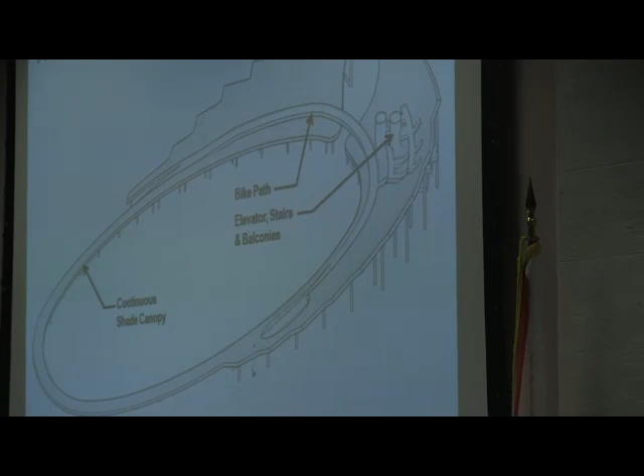So we put together a very knowledgeable group of consultants, and they brought in some other additional experts to help us at the level of the project that we are at today.

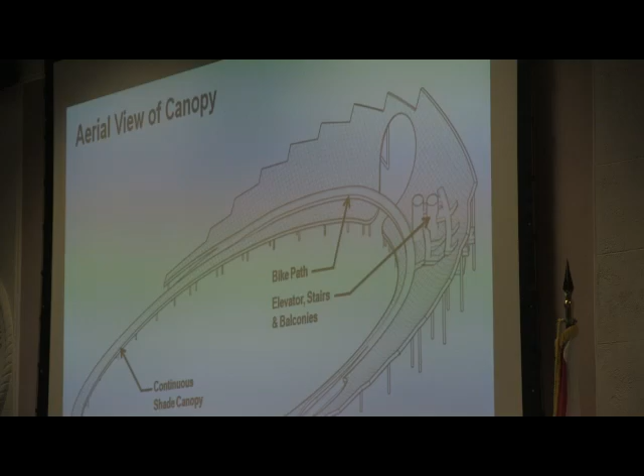Also, before I get into the details, I want to just give a little bit of background on kind of what got us here to the decision to go with a recommendation for an aluminum canopy.

In the basis of design, the team looked at several options, and the key to the canopy was taking into account the life cycle costs, the maintenance, the initial costs, and the visual impact. So the team considered a number of options.

One was precast concrete panels. The advantage of the precast panels was that they could be prefabricated locally. There's some delivery cost advantages. They can resist the uplift. They're heavy, but the heaviness also was a disadvantage due to the weight and the need to oversize the foundations. And also, in addition to those disadvantages, there's also the discoloration of the concrete due to mold and algae, the excessive formwork that's required, the difficulty to replace those panels, and just the overall maintenance.

They also looked at lightweight concrete panels. Again, it's got a great strength to weight ratio, long life. However, it's got complex connections and a very high initial cost, and also susceptible to some of the discoloration and mold and algae and maintenance.

Also considered, perhaps, fabric. Fabric was dispensed with fairly quickly. The ability for fabric to hold up under the extreme conditions over Tampa Bay just didn't work out.

So with that, the team at the BOD stage recommended that the entire canopy be made out of aluminum. And in the BOD report, they recommended an aluminum alloy, the 5086 alloy, and I'll explain a little bit about that, with a high-grade Kynar finish, which is the coating on top of the aluminum, and all of that on a galvanized steel frame, targeted to a 75-year life. Those were the standards that we put out from the very beginning.

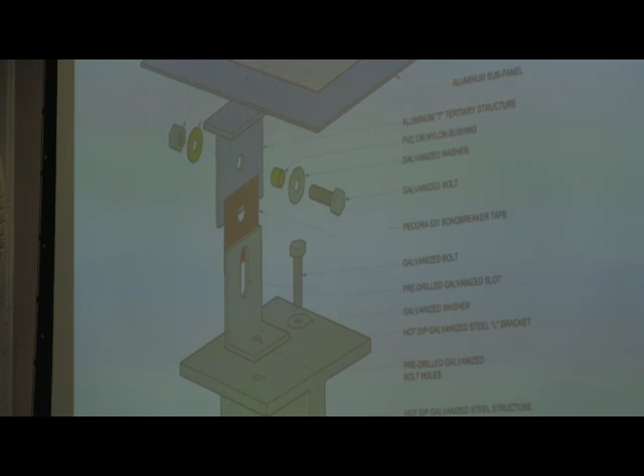So I want to walk you through the assembly as we're looking at it today. Again, this is schematic, still a lot of work left to do, and this is just one small section of the assembly. What's in blue is aluminum, what's in light green is galvanized steel, and what's in red and yellow are bond breakers set up to separate the galvanized steel from the aluminum. So I'll walk you through this.

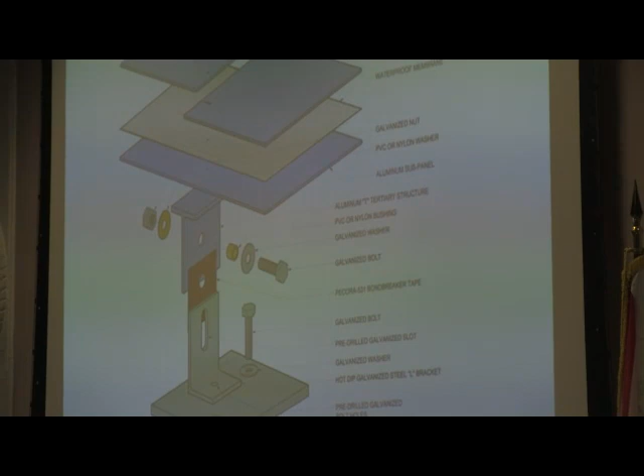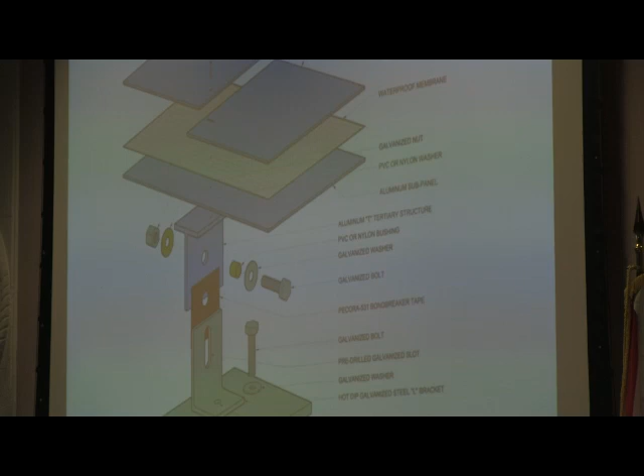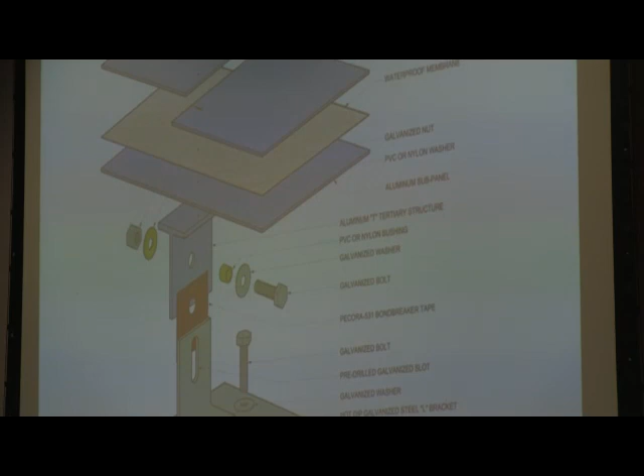We're well beyond where this development of the assembly would normally be at schematic design. On this particular piece, we'd probably consider this level of detail coming later in the drawing development, but we're further ahead. Still, there's plenty of work left to be done. The canopy is intended to be made out of common, everyday materials. It's the way they're put together that's unique, because the form is unique — the structure isn't unique, it's the form that's unique. There are two major elements to this assembly: one is the panel system, which is primarily what's in blue above the T.

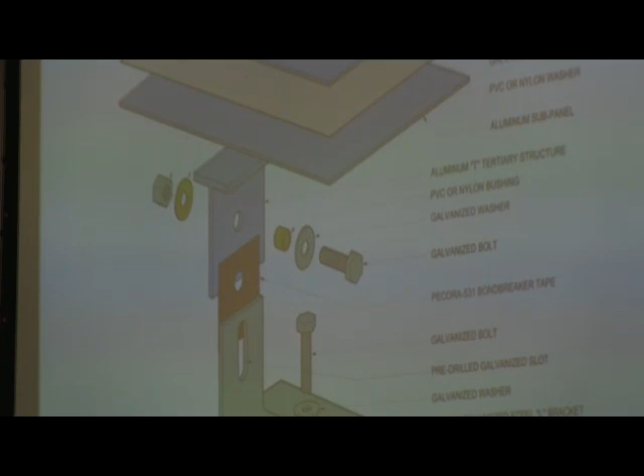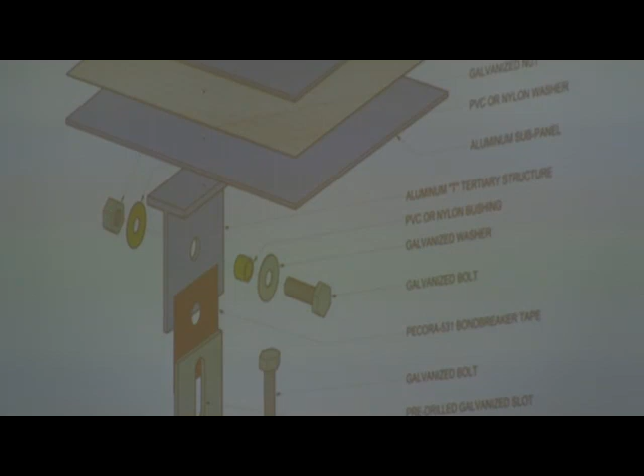That's the coating, the Kynar coating, on the aluminum panel itself, and there's two panels, basically 5 feet square. Then there's the fasteners. In this case, we're showing rivets, but the final fastener detail has not been determined. It could be a concealed fastener, or a different kind of rivet. There's also a waterproof membrane, and a sub-panel below that. The key to that entire panel is the waterproofing and maintaining that coating over the life of the system. Then on top, that panel is connected to the structure support system, essentially a steel superstructure with an aluminum T.

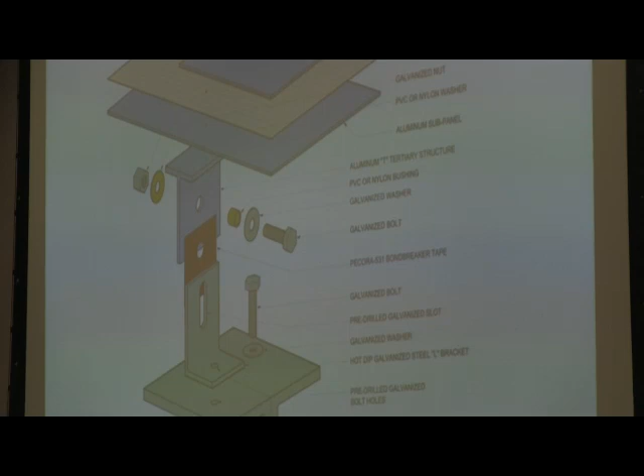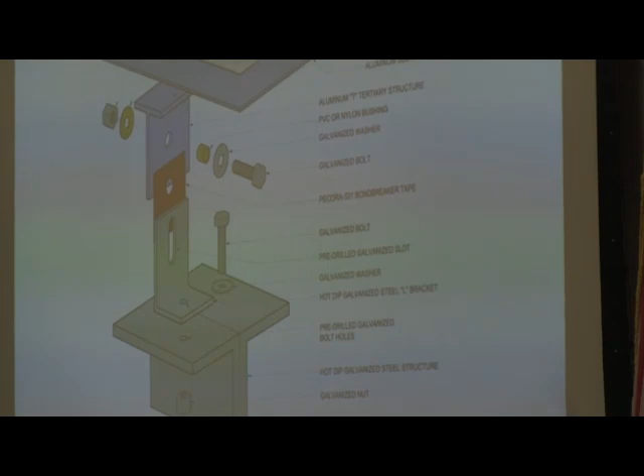So I can walk you through it. The top two panels of aluminum are connected to the aluminum T. The aluminum T is then separated from the galvanized L angle, and connected with a bolt. The bolt runs through a bushing, which also separates the galvanized bolt from the aluminum T. The galvanized L angle is then connected to the superstructure below. That assembly is reversed on the bottom of the panel, so what you're seeing is a section at the top, and you'll have the same detail at the bottom.

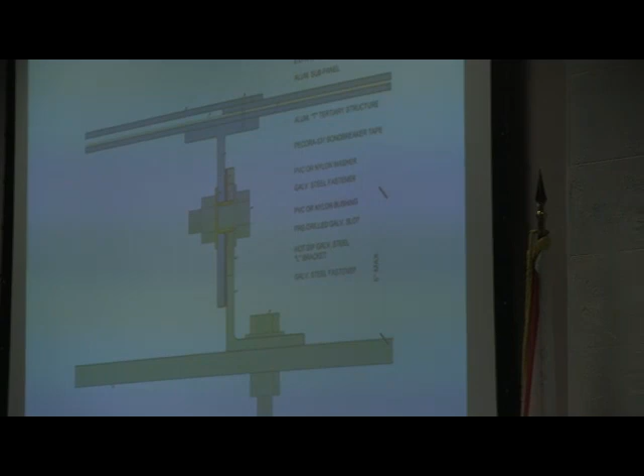This is a more straightforward detail of what that's going to look like. The zinc coating on the steel at this point is expected to be between 4 and 5 mils, and on top of that galvanized steel, that zinc coating, there's going to be an epoxy coating. So it's a duplex system of both zinc on top of steel, which is the galvanization, and then epoxy coating on top of that.

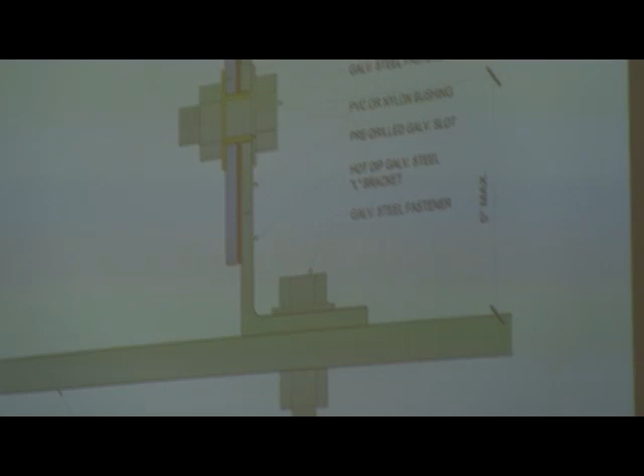The key to this entire design is in the details—the detail engineering, the detail design to avoid crevices, to avoid low spots, to avoid areas where water can collect. Again, the top end of this is intended to be waterproof, and appropriate drains are going to be created in the assembly. So all those design factors are taken into account.

The folks that we have talked to in the industry do believe, and the intent is, to obtain warranties on both the aluminum panel and the coating of 30 years each.

At this point, I'm going to turn it over to Tom, and he'll step you through a little bit more. Thanks, Rob.

I'm going to talk a little bit about the materials on this project. I'll back up a little, starting with the bridge. The bridge substructure and superstructure are typical precast and cast-in-place concrete, reinforced concrete structures that conform to DOT standards. The new bridge superstructure will be about 6 feet higher than the old bridge, which helps get us out of the splash zone. The DOT currently requires a 75-year design and service life for bridges, and that's our goal for this entire project.

The proposed metals in the pier canopy are low-magnesium aluminum alloy designed for marine environments. These are connected to an aluminum T, bolted to a galvanized steel angle with a PVC or nylon bushing, a washer, and then a permanent polyethylene bond breaker taped between the aluminum and the zinc-coated steel to prevent contact between dissimilar metals. The canopy will be at elevation 29 to elevation 108, so it will be well out of the direct salt spray zone, which helps with the longevity of the project.

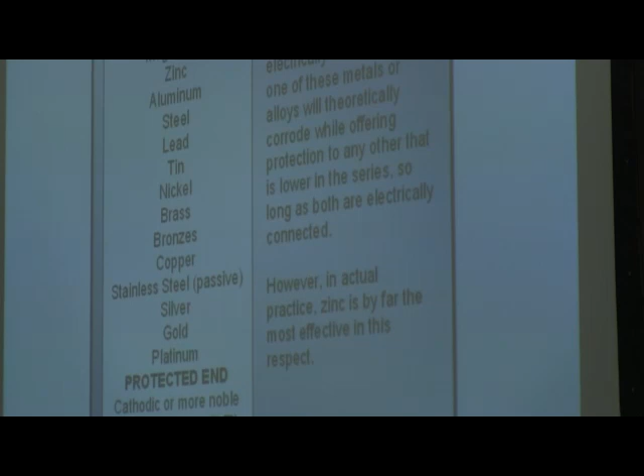This slide is a galvanic series of metals. The takeaway is if you look at the very top on the left, there's a series of metals: magnesium, zinc, and aluminum. The farther apart those metals are on this series, the more reactive they are. You can see that zinc and aluminum are very close to each other. Zinc is extremely widely used as an anode.

It sacrifices itself for the other metal and is used as cathodic protection. So zinc and aluminum are very close together. They are dissimilar, but on the scale they're right together, brothers and sisters. The DOT doesn't take any special precaution to isolate zinc and aluminum. Our project wants multiple redundancies in our design, and we've isolated these two materials to prolong the service life.

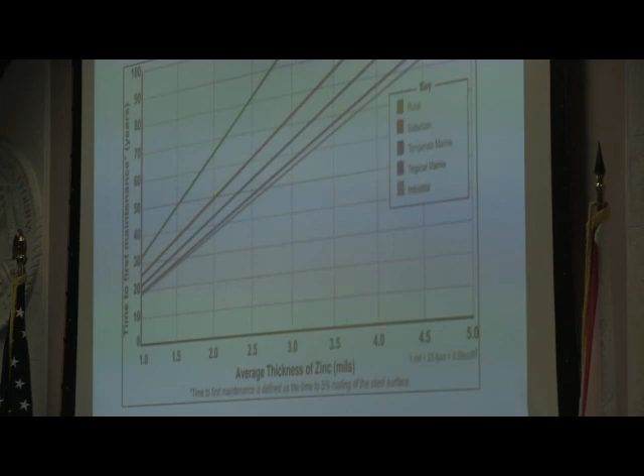The next slide is the American Galvanizers Association service life chart. This is a typical life expectancy for galvanized metal. On the vertical axis is time in years, time to first maintenance - this is when you start to see rust blooms on your product. On the horizontal scale is zinc thickness in mils. If you look on the second line on the bottom, that's our tropical marine environment.

So the service life of galvanizing depends on the environment. The worst environment is the lower line, industrial, with a lot of pollutants in the air. The next worst environment is our environment, the tropical marine - high temperatures, a lot of rainfall, and salinity. So we can see that between 4.5 and 5 mils of zinc, we should get between 70 and 90 years of life, according to the experts.

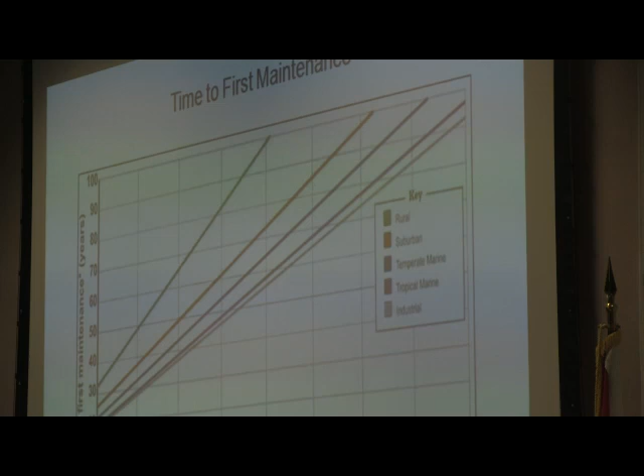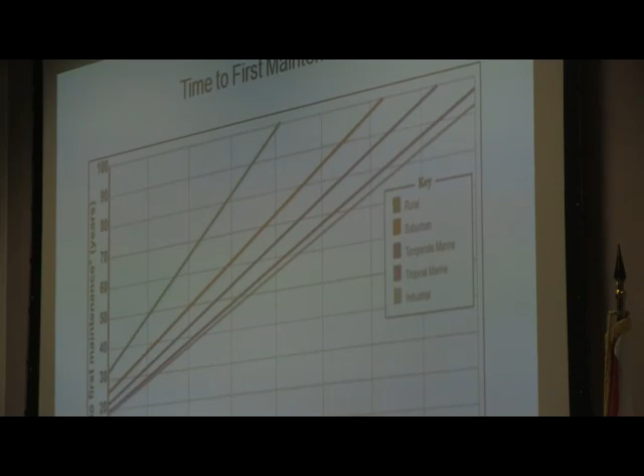Now this is just a generic design table. What I've asked the design team to do is a specific analysis of our environment, including the pollutants in the atmosphere, the salinity, the chloride in the air, and the wetted time having to do with our rainfall - that's very important, the wetted time, and the temperature. And they agreed to do that.

At this point the design is not done for this project. We're proposing a duplex system: the steel is coated with 4 or 5 mils of zinc, and that in turn is coated by epoxy coating. So you have redundant protection for that basic structure.

Now, power companies and the DOT have been using galvanized steel poles increasingly to provide wind-resistant structures.

Aluminum is used throughout our marine environment, and typically we have a 5,000 series marine grade aluminum. It's corrosion resistant because it forms a protective layer of aluminum oxide on the outside of the untreated aluminum. In and around water, aluminum will eventually develop pits, which are not structural in nature. The pits are limited in their depth because the aluminum oxide seals them, but they do create an appearance problem.

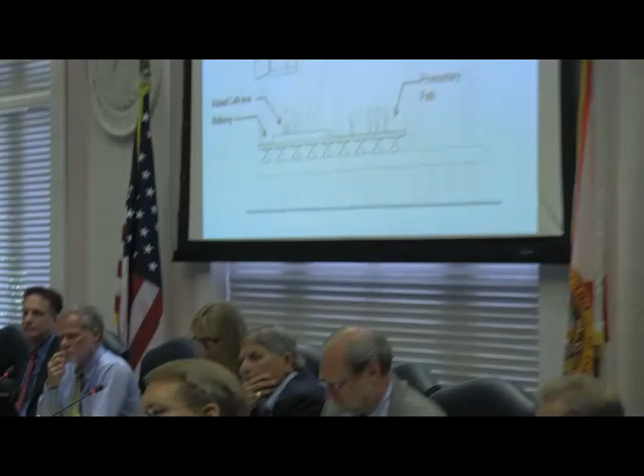The next item we want to talk about is our understanding of the concern over the challenges of the configuration of the canopy and its location. I understand there's a lot of concern about the wind effect - the effect of wind on people, the effect of wind on the structure. I'm going to try to explain where we are on developing an answer to this issue. It's an issue that, like every other issue that's been brought up, we take very seriously. We know that even today, you walk out on the pier and there's significant wind issues. There's a reason why fabric canopy structures don't last out on the pier. Understanding that, what we've challenged the design team with is to...

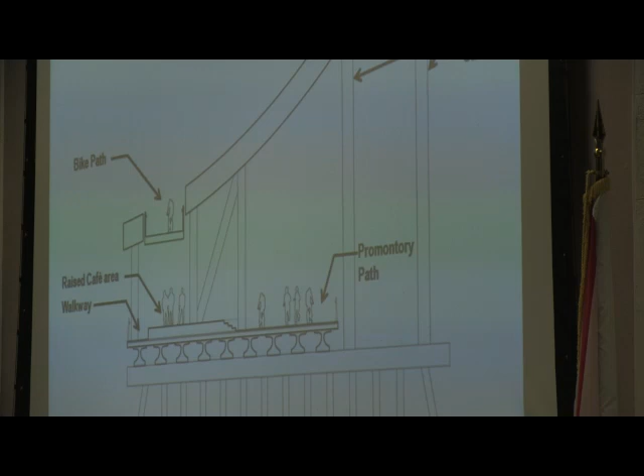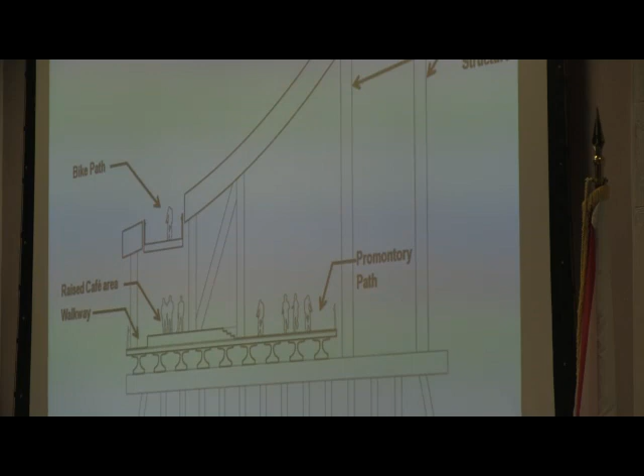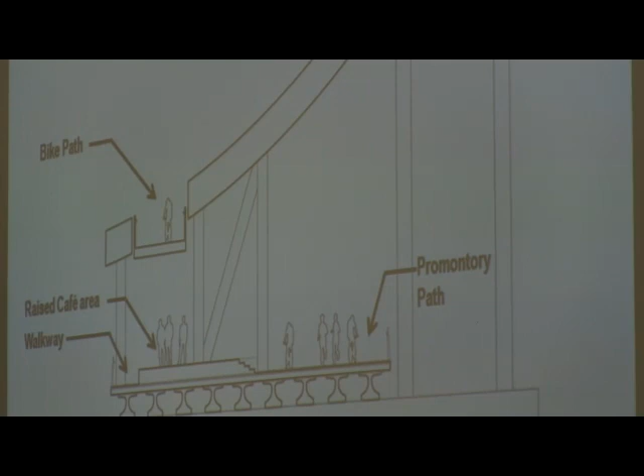perform a series of tests required to determine exactly what the issues are. The analysis of wind effects on this canopy is a very complex process, and it affects not only the structural design, but also the experience within the space itself. The initial wind loads - to give you a picture of where we are today - have been calculated on a desktop model to determine the initial cladding wind loads on the canopy itself. That's to get us through the schematic design, to help inform the cost of the project and where we need to be. The only way to truly predict the effect of wind on a structure like this is by putting it into a wind tunnel.

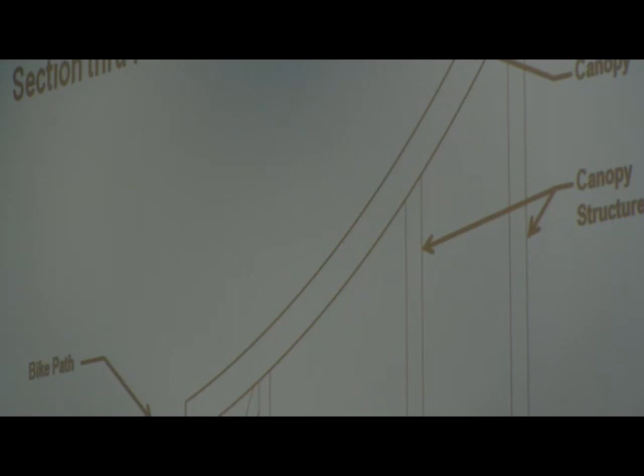That's done on every type of complex project. It's something we anticipated doing, something we plan to do. So the next series of tests will involve a wind tunnel to confirm the computational models and further refine the wind loads to complete the structural engineering on the canopy. All of this was scheduled to be done during the design development phase, so in the next phase of design, those detailed wind tunnel tests will be performed.

In addition to the wind tunnel test to determine structural integrity and structural uplift loads and confirm those decisions, the team intends to perform a pedestrian comfort study to determine exactly what effect particular wind speeds have on the shape and character of the canopy at this location. When that study is performed, there may be areas that come back saying, okay, you need to look at this a little further - here's some hot spots, you need to take these issues into consideration. And really, the analogy here is just like everything else we've done in this project.

We're not going to design a foundation for this pier without doing geotechnical tests. You can assume the foundation depth, you can assume the length of piles, but until you do that detailed geotechnical test, you can't engineer the foundation. The foundation size, the length - all of that's going to be factored in with the results of those tests. Same thing here - once we do the wind tunnel test, we will know what issues we need to contend with and analyze those results and accommodate any changes within the design itself.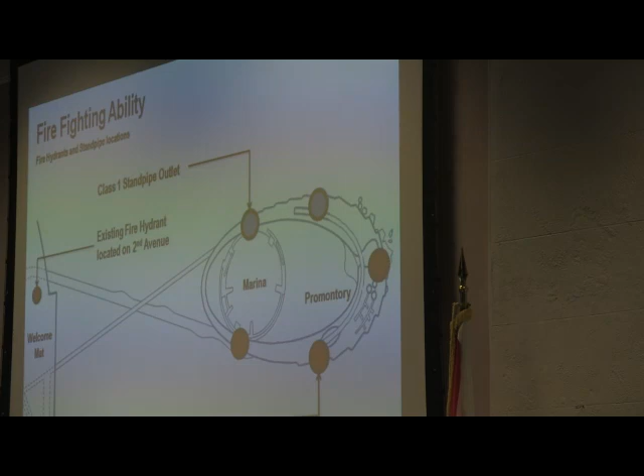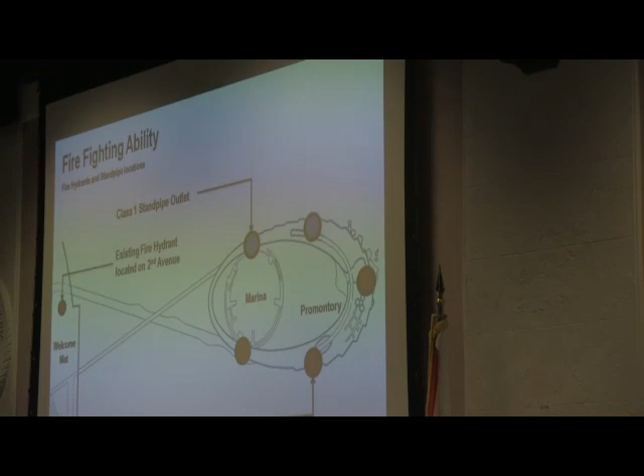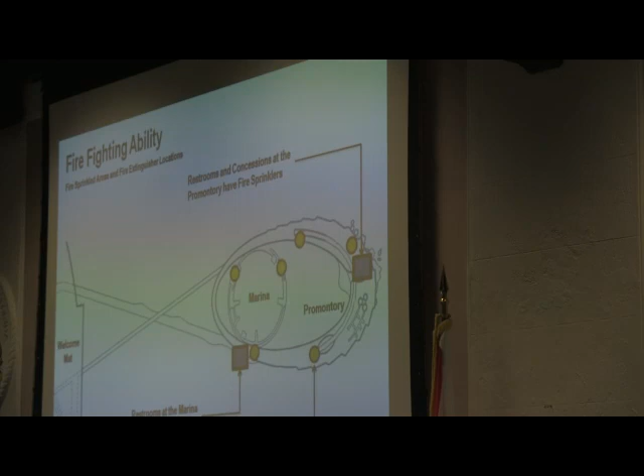So the specific things we've looked at to ensure the ability to fight fire on this pier: again, it's all non-combustible materials. We're going to have a 6-inch fire main providing water from the land to the end of the pier. We've got fire hydrants in 3 separate locations, and standpipes on the opposite end of the marina, all meeting life safety requirements. There will also be an occupant notification system at the hub so anybody can announce an emergency and evacuate the pier. All enclosed buildings, including the concessions and restrooms, will have fire sprinkler systems, plus fire extinguishers.

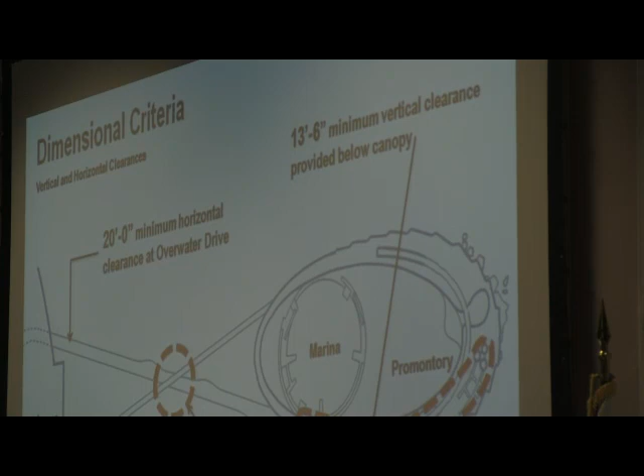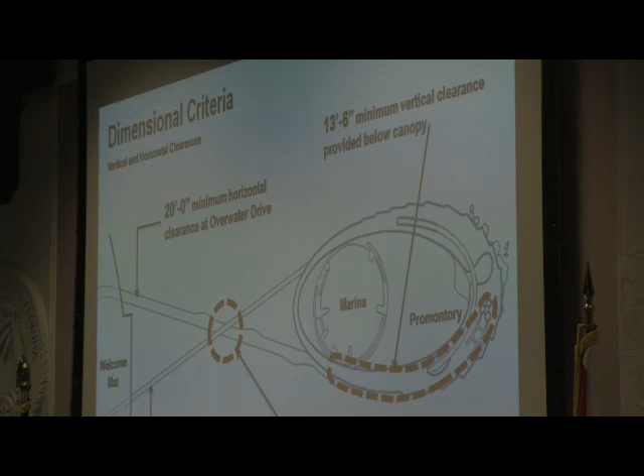A number of questions have come up about the dimensional criteria and the fact that this pier does not meet the dimensional criteria for the fire department. The requirement is a 20-foot minimum horizontal clearance on the overwater drive to provide fire access all the way to the back of the pier. At every point where there's a vertical issue, there needs to be a 13'6" minimum vertical clearance.

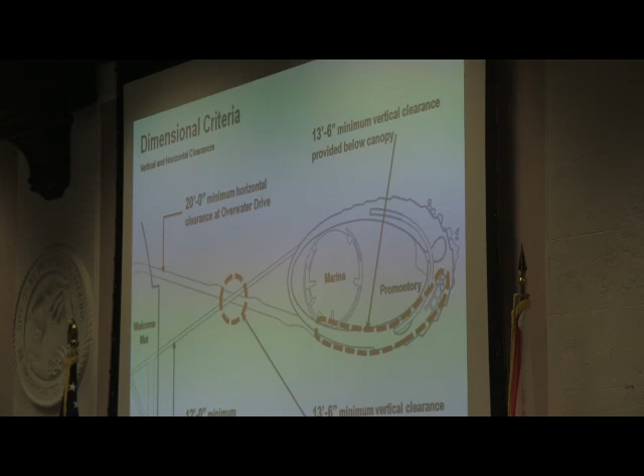The first location is where the overwater bridge overlaps the overwater drive. From the deck of the overwater drive to the underside of the overwater bridge structure, there needs to be 13'6", and we meet that requirement. We meet the 20-foot clear all the way around the pier, and also underneath the canopy.

The canopy—you'll see it on May 2nd when we show you more details and actual designs of the canopy and layout—has, at every location, a 20-foot wide clearance between the columns around and underneath the canopy and over to the turnaround.

The fire truck itself: working with the fire marshal and fire chief, it's been determined that the apparatus serving the end of the pier is the fire engine, not a ladder truck. The pier is designed for a load capacity of 40,000 pounds, and the fire engine is 36,000 pounds. So the whole pier is being designed around the ability to provide a fire engine to the end of the pier.

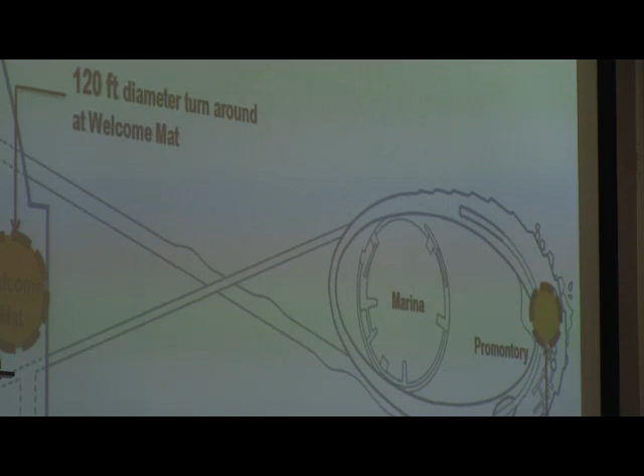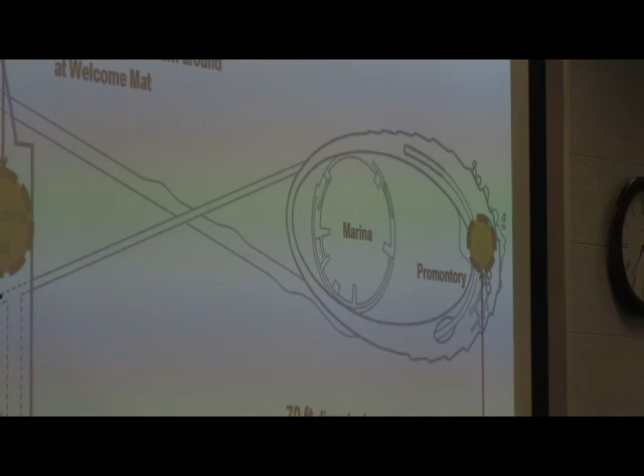Again, the turnaround issues: at the end of the pier at the promontory, there's a 70-foot diameter clear turnaround with a 20-foot horizontal clearance, so the fire engine can make its turnaround and meet the required turnaround radius. At the welcome mat, the diameter is 120 feet, so the fire department can bring the ladder truck up and meet their turnaround requirements.

The one issue we've spent the most time on with the fire department and building department is egress—getting people off the pier and evacuating it safely. This process involved 4 months of work, multiple meetings, and a very sophisticated software program. I'm just going to go through the highlights, because explaining it fully would take an hour.

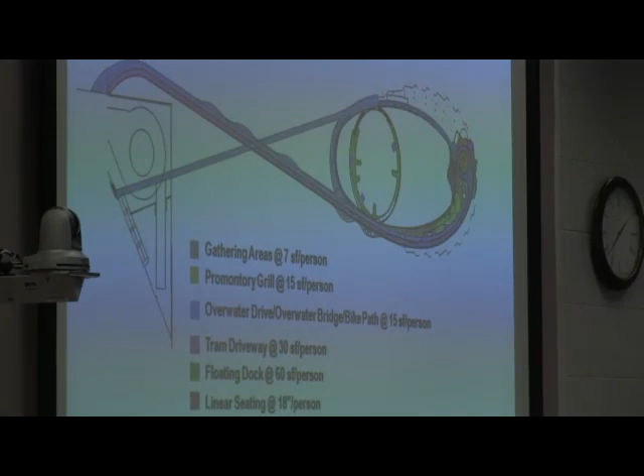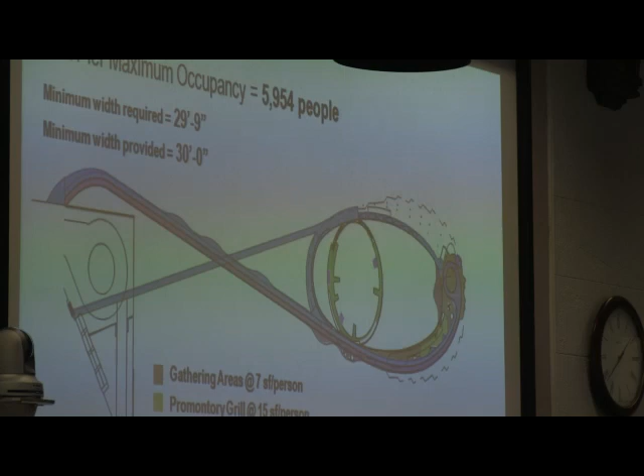The issue is, how do you determine what the occupant load is of the pier? Working with the building department and the fire department, we've looked at each individual component and applied an occupant load for that area. For example, the gathering areas shown in orange are based on 7 square feet per person. Other areas have a little bit greater area per person.

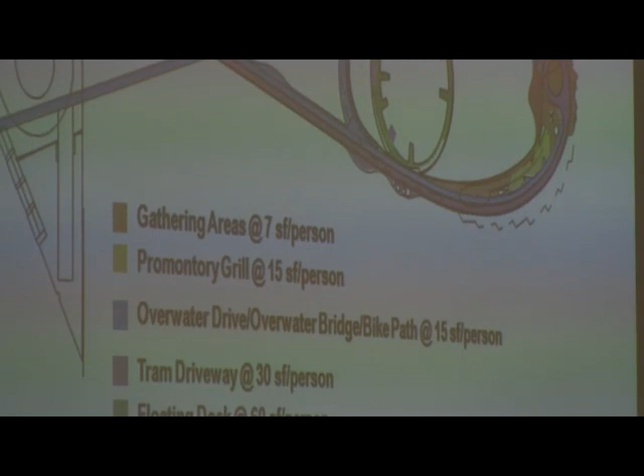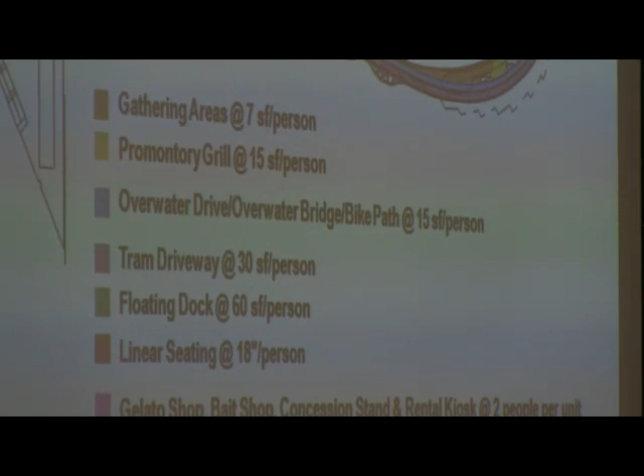All of that has been reviewed and approved by the fire department conceptually at this point in order to establish what that occupancy is. Based on that occupancy, then we know what to plug into the model, and the issue is how wide these pathways need to be to effectively evacuate this many people.

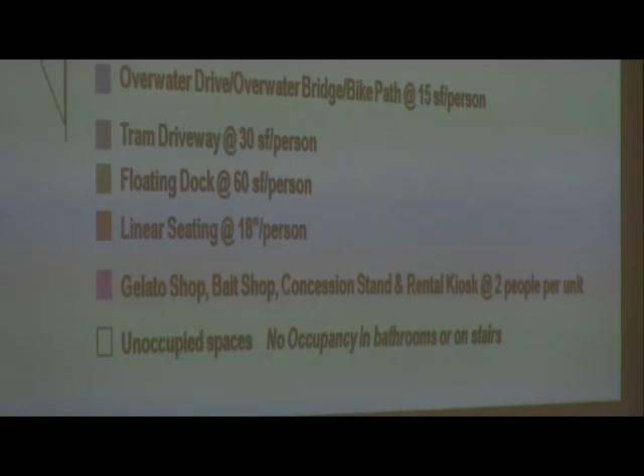This occupancy load is based on the worst case. This is a special event, 4th of July, on this pier, first night. These are the days that you don't have - this doesn't happen every day. On a given day you might have 1,000 or 2,000 people, but on a special event, this is the occupant load. So it's been determined that it's the basis of our design going forward.

The next thing we looked at is the travel distance. What's the length that it takes you to get off the pier from the end? The model is based on evacuating the pier based on the egress width in a reasonable time. So the issue is, how do you determine what that reasonable time is given the widths that we're working with?

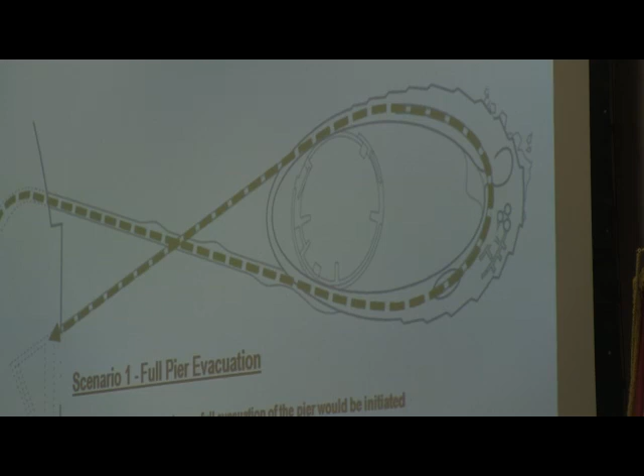What we're trying to do is determine - and there's a couple of aspects of this - one is creating a safe zone within the structure that people can evacuate to. If there's a fire out, say at the promontory, the distance that a fire is from the safe zone is something we'll have to determine, as well as the time it would take for someone to evacuate that area to the safe zone, and the time to completely evacuate the pier.

So we looked at 3 scenarios. The first scenario is just the normal evacuation - forget about a fire incident, but say it's bad weather or a security incident. How long does it take to get people completely off the pier at a 5,954 occupant load?

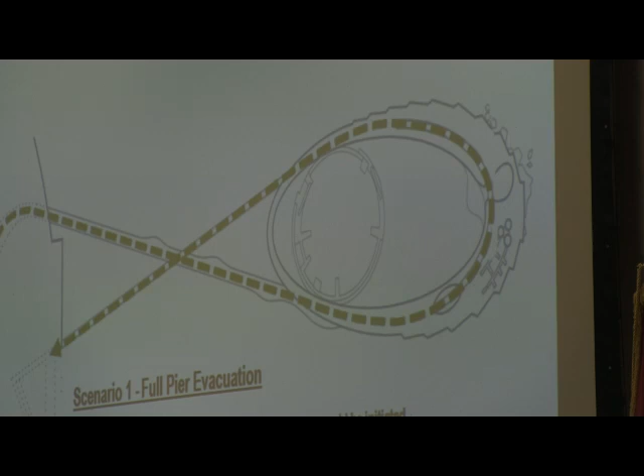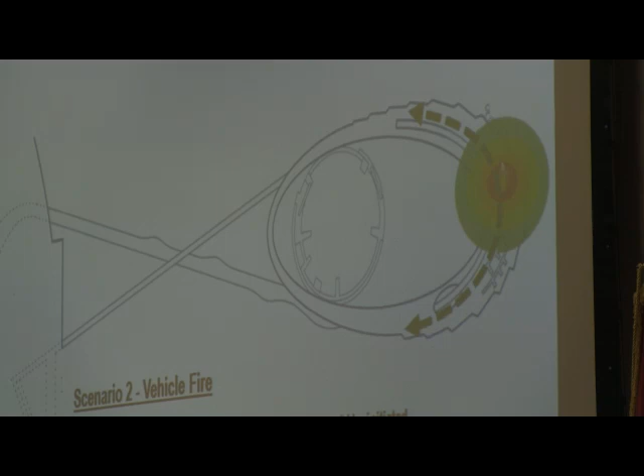The second scenario we looked at was, what if there's a fire at the promontory? How long does it take for people to get to a safe zone, and how long does it take them to completely evacuate the pier?

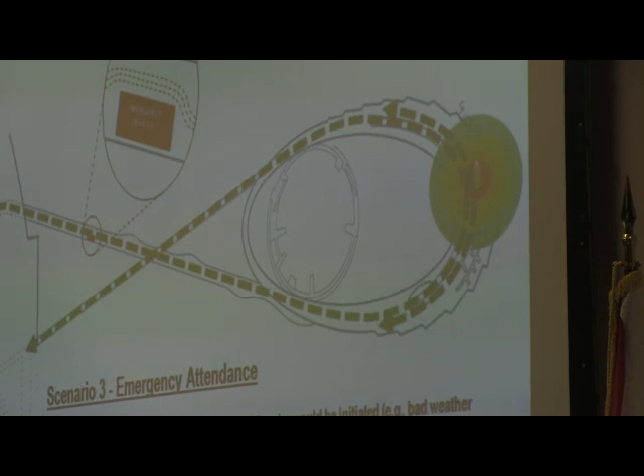The third scenario we looked at is, what happens if there's a fire truck as an obstacle on the Overwater Drive headed towards the fire at the end of the pier? How long does it take people to get to a safe zone, and how long does it take them to evacuate the pier?

I'll show you a little bit more about the model itself. The model is, again, very sophisticated. It requires the development of demographics...

...and plugging into the model a percentage of people that may have different mobilities and different ages - children, older people - and putting into that whole mix, how long it takes for each of them to conceivably move and find their way around. This is just kind of a snapshot of what the model does.

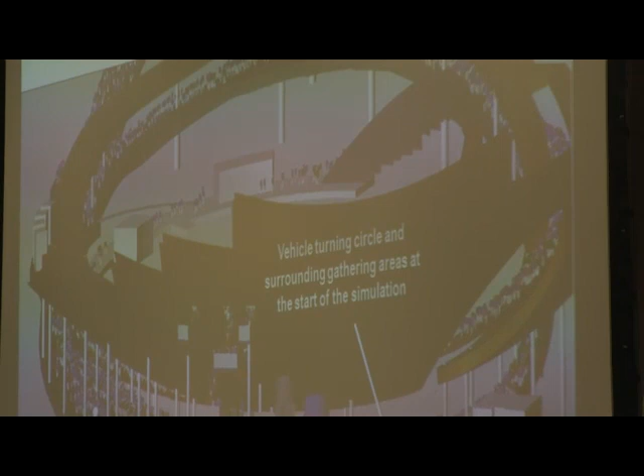This is looking at a fully loaded condition at the end of the pier on the promontory, and all those little spots are plugged into the model. Each part of the pier has been allocated its occupant load based on the occupancy count that we showed a little bit earlier.

So the question is, if there's a fire event at the end of the promontory, how long does it take? This is what the model predicted: in 2 minutes and 25 seconds, that area of the pier could be evacuated. Those occupants could get to a safe zone away from the fire.

Finally, for each of the scenarios: the total egress time for scenario 1 was 13 minutes and 14 seconds under non-emergency conditions. Under scenario 2, with the fire at the end, it was 2 minutes and 25 seconds to get to a safe area, then 13 minutes and 14 seconds to fully evacuate the pier. In scenario 3, with an emergency vehicle obstructing Overwater Drive, it takes a little bit longer to get off the pier - 18 minutes and 26 seconds.

I know that's a whole lot of technical information, and believe me, there could have been a whole lot more, but the summary is, there's a lot of work that's gone into the determination that this pier can be safely utilized, safely evacuated, and that fire can access and provide fire protection for this facility.

And with that, I'd like to just ask Chief DeMonte if he could take a second, if he has any comments.

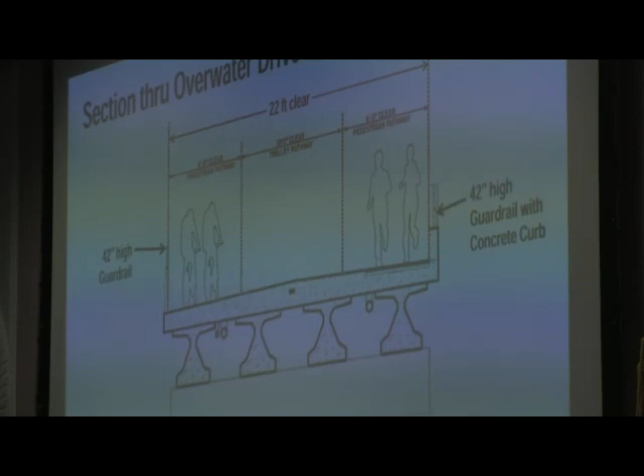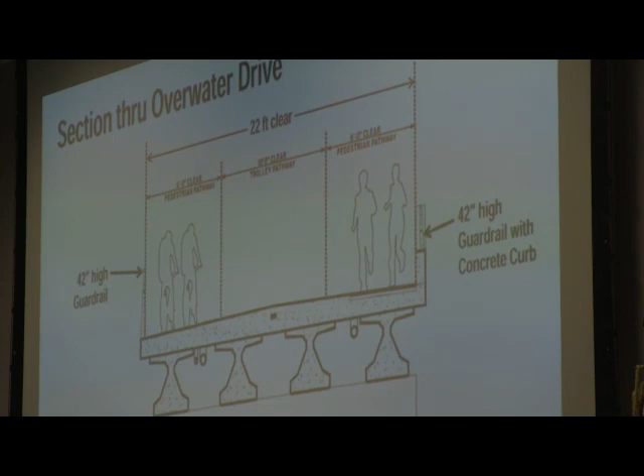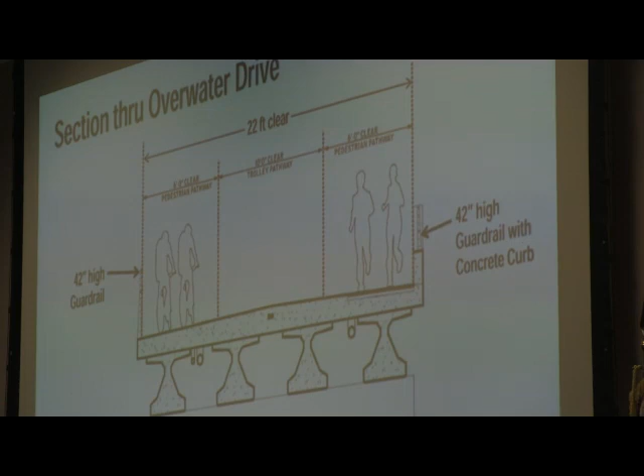The key to understanding the perceived conflict between people, bicyclists, and vehicles is that the tram, which is the number one vehicle out there daily - probably every 15 minutes there's going to be a tram - needs to be part of the experience. The tram needs to be extremely slow moving, open air, and part of the experience to get out to the pier.

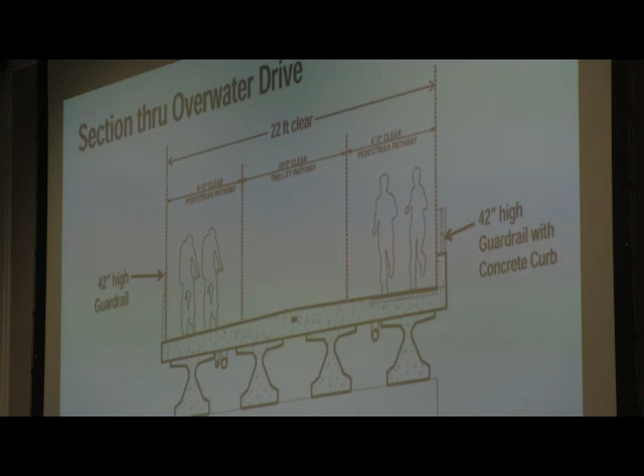The tram will be limited to 5 miles an hour. Just to give an example of what that means: it will take 3 minutes and 36 seconds, at 5 miles an hour, to get from the beginning of the bridge to the end of the pontoon. That's less than 4 minutes. There's no hurry to get to the end of the pier - the idea is that you'll have a very slow-moving tram.

The other issue is that the current pier trolley, the red trolley, has exceeded its service life and is scheduled for replacement. That trolley is now used for charter service and will continue to be used for that. However, that trolley is not what's intended to be used for the pier.

We're working with transportation staff and the rest of the city staff to look at replacing that trolley on the pier with an eco-friendly trolley. We're looking at a trolley that's not going to be more than 6 feet wide, that can handle speeds no more than 5 miles an hour, and it's going to be an open-air trolley. There are multiple examples of that.

At the right time, we're going to plug in the transportation staff and really look at this issue from the usability standpoint, and how do you get people safely to the back of the pier on the trolley.

Service vehicles will also need to be authorized by the city. So if you've got a service and you need to do something out at the pier, you're going to need to have your vehicle authorized. You're also going to need to go no more than 5 miles an hour. The pedestrian will have the right of way in this design at all times.

With that, I'm going to turn it back over to Tom, and we'll go over the DOT. Yeah, just real quick, I wanted to go to the bike ped design requirements.

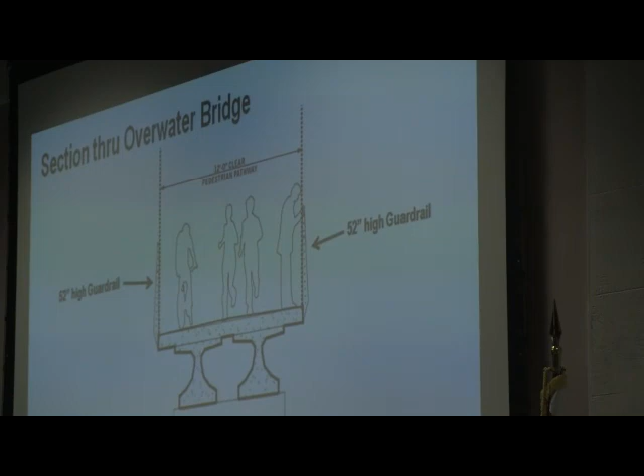One more thing to go over, and I'll turn it over to Tommy and then to Chris. The other question was about the overwater bridge, the high bridge that crosses over the drive. In the basis of design it was shown as 10 feet, which is the minimum width in the DOT standards, the manual for uniform standards for design and construction, for a shared pathway with bicycles and pedestrians. 12 feet is preferred, and we've been working with the design team and the budget. In the schematic design, we've increased the width of that bridge to 12 feet, which exceeds the minimum standards. We feel fairly confident that's going to work. The guardrail at the overwater bridge is 52 inches high.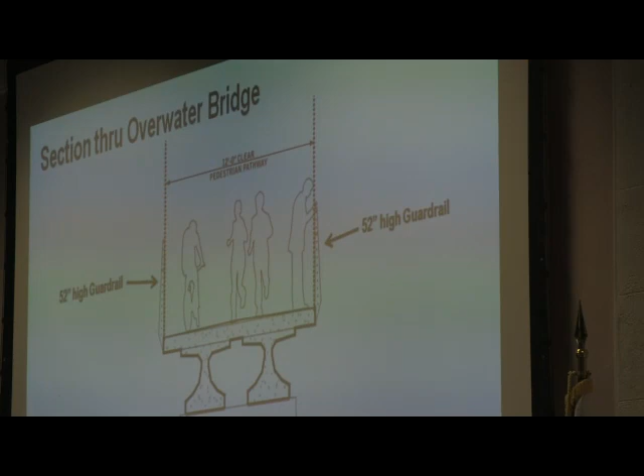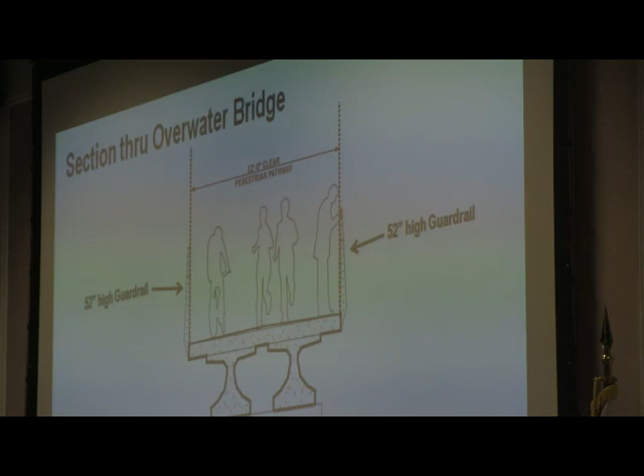Another question that came up was about the ramp at the end of the bridge, its slope and location. That ramp hasn't been completely designed yet, and one reason we're holding off on the details is that the Columbia restaurant's design is going to have a lot to say about that ramp's location and configuration. So we recognize the concern. The intent is that when you reach the end of the overwater bridge, you'll probably have to dismount your bike and walk it down that ramp. It's not intended to be a ramp you'd easily ride a bike down. We still have some work to do on that, but we recognize the issue and know it's something we'll have to deal with going forward.

Tom, did you want to wrap up and then turn it over to Chris?

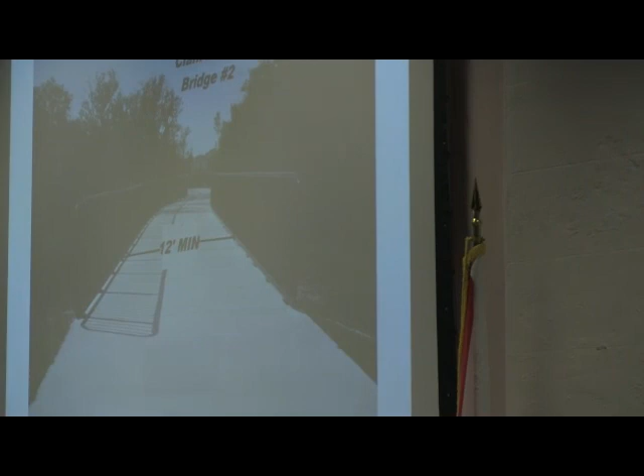Just as an example, this is our new Clam Bayou Trail. We have 5 bridges, the longest one is 700 feet, and it's 12-foot wide. It's a pedestrian facility with pedestrian railings, designed with an H10 vehicle loading so we can run service vehicles down this facility when needed, and also if we have to rescue somebody, we can run an EMT truck down that trail to pick up someone who's had an accident. That's just an example of the kind of design thinking we go through. The base substructure is capable of supporting all the vehicles, but it's a pedestrian facility.

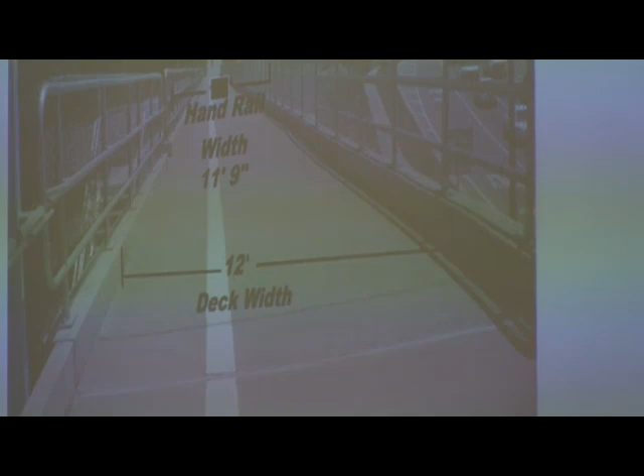As far as the slopes and on bike trail, this is a ramp on the Pinellas Trail at Tyrone Boulevard, 12 feet wide, with a handrail, and the slopes conform to the standards of the day. There's another one at Tyrone and Park Street. So we'll be designing our facility to meet the standards and operational considerations that we require.

Thank you, Tom. Chris Ballestra, City Development. Just to cleanse the palate for a moment, while your focus today is on the technical issues, there has been a question or two raised, and things have changed a little bit, I believe, for the better relative to what's happening on the projected financials for the new St. Petersburg Pier.

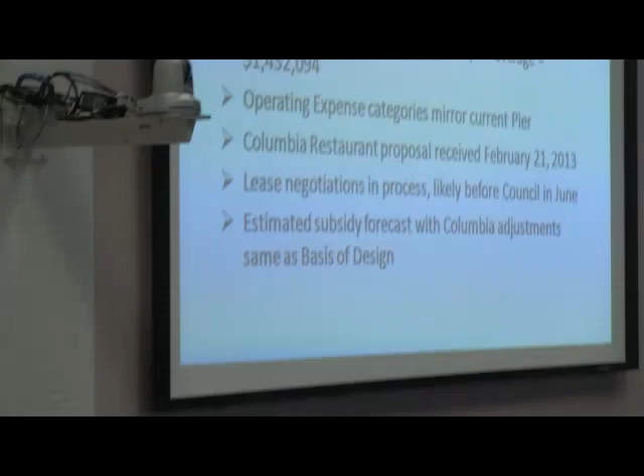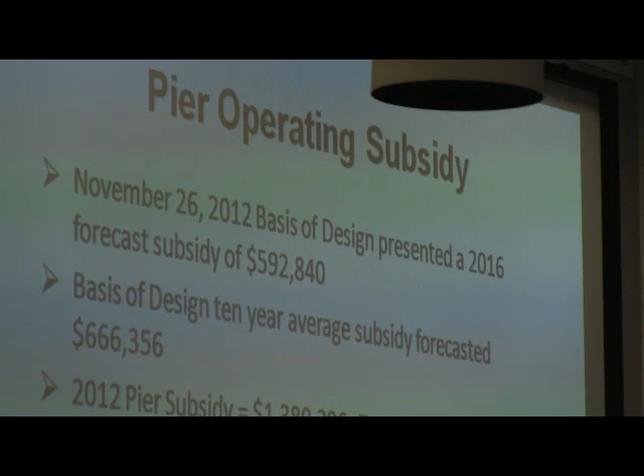When we presented basis of design, there's a forecast subsidy in year 1, which would be 2016, of $592,000. The 10-year average is $666,000. That was the subsidy presented to you at that time. The average subsidy today for the last 10 years has been about $1.4 million. The most recent closed out year last year is 1.38. So that just sets the table as to where the numbers are today, where the projections are tomorrow.

Projections aren't just that, they're forecasts, they're pro formas, they're built on assumptions, and they are guaranteed to adjust, change, and evolve subject to design, expense implications with the design, and the revenues associated with them.

To that end, a very big change—I'll keep my comments brief because we're focused on technical, not numbers—but between December and today, we're all well aware that the Columbia restaurant has submitted a proposal to the city. In an abundance of caution, we published that and invited competitors to be a part of this process.

And that is understandable, and also a good reason why maybe nobody else submitted a competing proposal. The limitations are for a 10-year lease on this piece of land, and it's for a restaurant that the developer will not own. So effectively, they're writing a very large check, $3 to $4 million, and paying rent, and they'll never own the building, and they're betting that they will have the ability to have a lease renewal or ask for a referendum down the road. So it's a very high bar that is set for this piece of land.

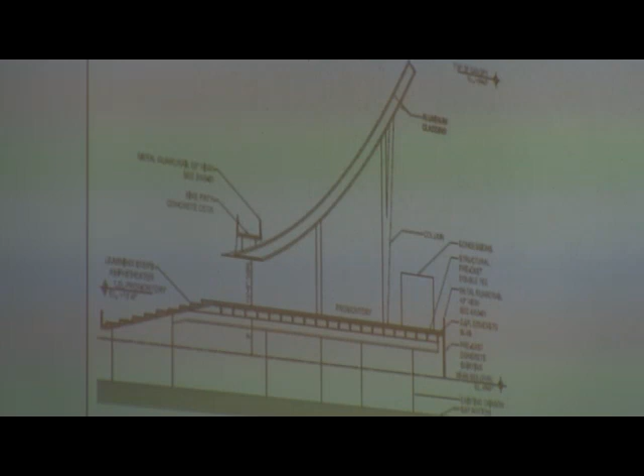There are many ramifications that come from that, primarily the trapped condensed air inside that tank that differentiates it from any exterior light pole or any other structure that is not trapped in a tank, that may heat up to 100 degrees and hold all the moisture it will hold, and then cool down at night to create condensation that, together with bird poop, rat droppings, and everything else that will accumulate in there with time - excuse me for being rude, but this is the way it works.

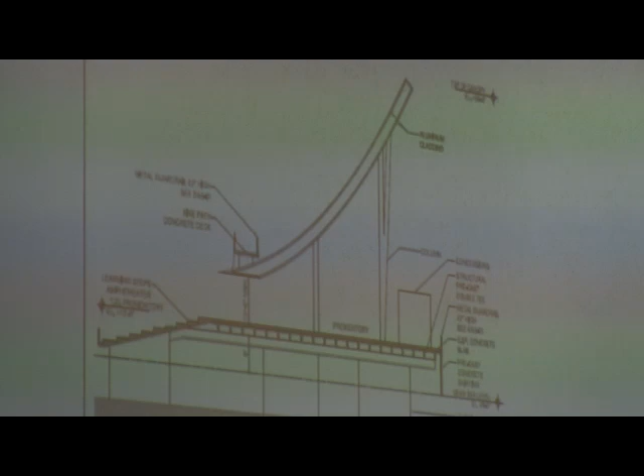You start bridging these wonderful - and that's an elegant design - Mother Nature has a wonderful way of bridging those gaps. Mr. Cairns is here to address that further. That's his business.

The state fire marshal, if I read the fire code correctly, not the local authority, is the person who passes on the adequacy of the turnaround.

I had a call one day at my office from a law partner: Bill, your pickup truck is on fire out on 34th Street. Well, Bill's pickup truck could have caught fire anywhere. It could have caught fire parked under there, if it was the service truck out there working on the elevator on this structure, it could be burning there.

Query: how does one of those giant fire trucks come out and turn around if something has blocked up the turnaround out there? It appears that it would have to back 1,500 feet to get off this structure.

We do not have a quarrel with the structure of the bridges. We do have a quarrel with the concept that you can build these as pedestrian bridges. If you're building them as pedestrian bridges, nowhere do we see in the budget anything that is going to control the access on these pedestrian bridges. In your basis of design book, you mentioned food trucks out there. I mean, we take our cues from what these people publish.

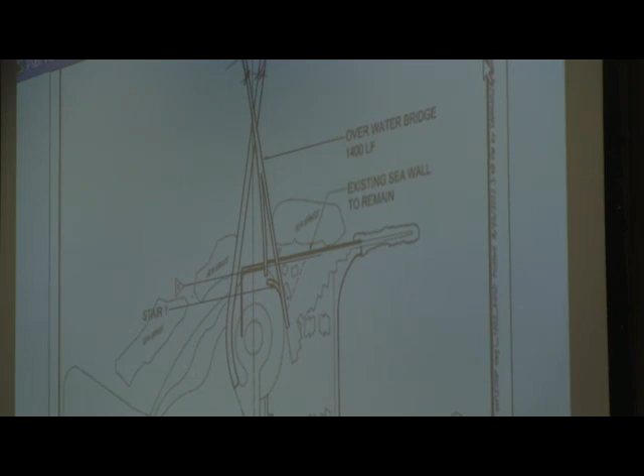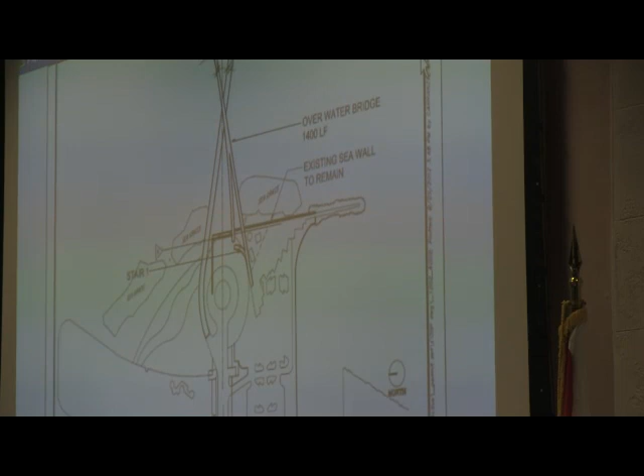This is what you were looking at in August of 2012. There was this upper bridge ramp that gave a clean departure from this 29-foot high bridge if you're on a bicycle. So what have you gone to today?

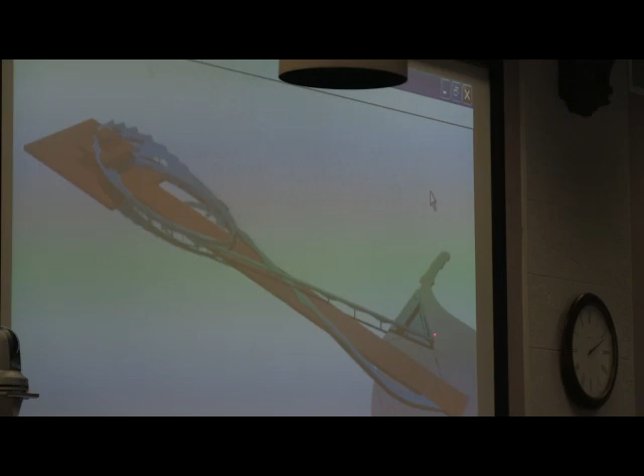Now FDOT says you should plan for 20-mile-an-hour bicycles, where your 20-mile-an-hour bicyclist is hitting about a 100-degree turn and going down a ramp that has to level out every 5 feet. Every 30 feet of length, it's going to have a 5-foot flat spot. This is a pedestrian ramp at the end of what purportedly was to be a bicycle and pedestrian facility.

I ask you council members to consider whether that facility is worth $7 million to the city of St. Petersburg.

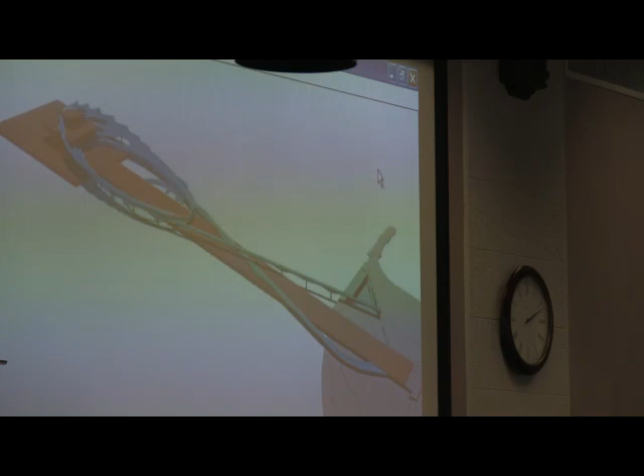What was the last question, Mr. Ballard? The last question you just posed?

No, I get the 100-degree turn. Is that facility worth $7 million to the city? That upper bridge, which is essentially a pedestrian bridge.

Now, it was stated that 12 feet wide for that upper bridge is a preferable width. I'm sorry, sir, but in the documents I provided you in December, it flat out stated in both the structural guideline manual and the FDOT plans preparation manual that a shared use path bridge had a minimum requirement of 12 feet. So if you wonder why people get skeptical of what is being presented to them, that is a first-class example.

What you advance money for the next design phase with a feature like that has been brought to your attention by my communication December 3rd, and no mention was made of that to you at the meeting. That is why we take it upon ourselves to try and bring these matters to your attention. What we had hoped was to have you all discussing these matters informally rather than with show and tell.

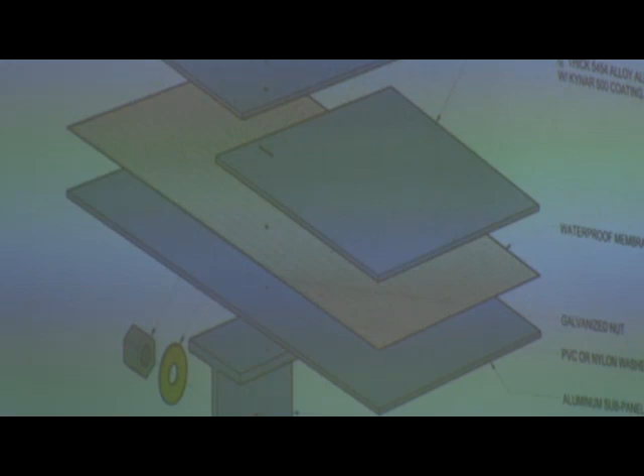Okay, so we can discuss that later, concept-wise. I was just trying to understand this.

The last question I have is, there was also a question in the correspondence, Mark, about the use of TIF funds over 30 years. Did you happen to catch that in the correspondence? I can talk to you about that later, but we are authorized by the county to use TIF funds, and we can bond them out to the extent that we are authorized to, which is, I believe, a 30-year foundation.

Okay, I'll get with you later, but that was an issue raised in the correspondence. Thank you. Mr. Connors, was that the question you wanted answered, or no? Yes, it's been answered.

I guess my one question to you folks is, the question is not did city staff answer the questions to your satisfaction. The question is, did city staff address all the issues that you feel you raised and expected to hear them address?